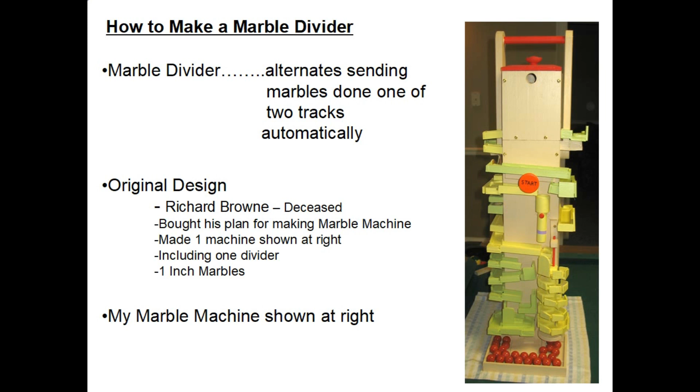Now, I got the original design for this from a Richard Browne who died a couple years ago. He was a retired engineer. He made the marble game for his granddaughter, and my version is shown on the right, and then he sold the plans to a woodworking company, and then I bought the plans from them, which included plans for one divider. And of course, this model is based on 1-inch marbles. I made one of these, and my finished marble machine is shown at the right.

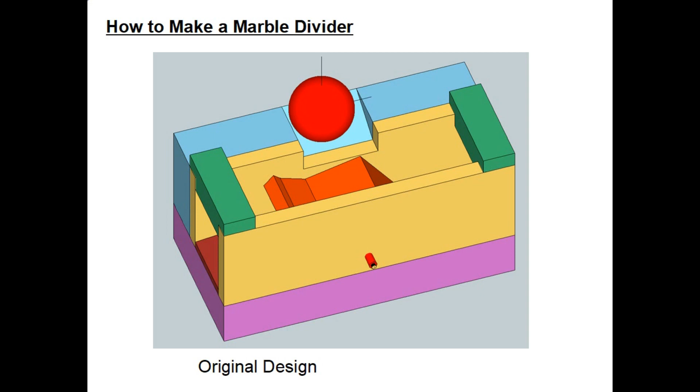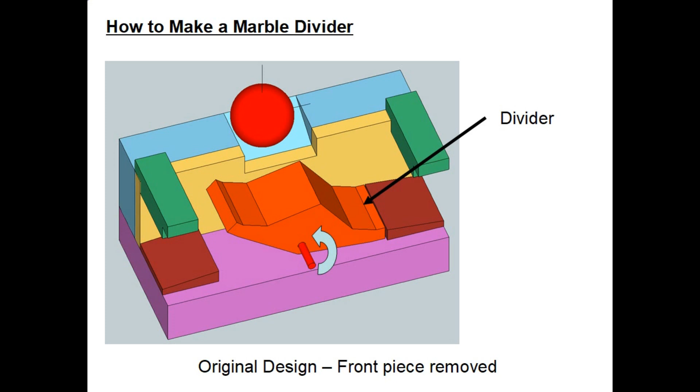This is a SketchUp drawing of the original marble divider that was in Mr. Browne's marble machine game. Let's temporarily remove the front cover from the divider so we can see all the parts inside. And there really isn't much to it. The main element is the center orange piece, which is the divider or flipper, and the rest is just kind of a box to hold up the assembly.

Now let's take a look at how this device actually works. I've got 6 series of diagrams here. They start at the upper left, they flow down to the bottom, and then go up to the second column to the top and flow down to the bottom. In the upper left, you see the marble. It's ready to enter the divider. On the second picture down, you see that it's now fallen down against the flipper. And then the third one at the bottom, it started to move towards the bottom because of the weight of the marble.

Now in the upper right, it's continuing to move down. The second photo, or middle one on the right, the marble's got the flipper clear down now, and it's ready to exit the device. And on the bottom right, you see the marble on the tapered piece where it leaves the divider and enters a track.

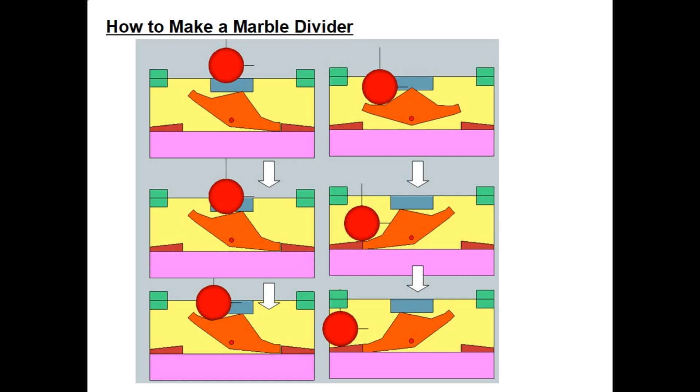Now after that first marble left the divider on the left-hand side, notice that the flipper, the left-hand side, is still down. Now here comes the second marble entering the divider at the top. In the middle, it automatically goes on the right-hand side of the flipper, and the weight of it pushes the flipper down until the marble exits on the right-hand side of the divider.

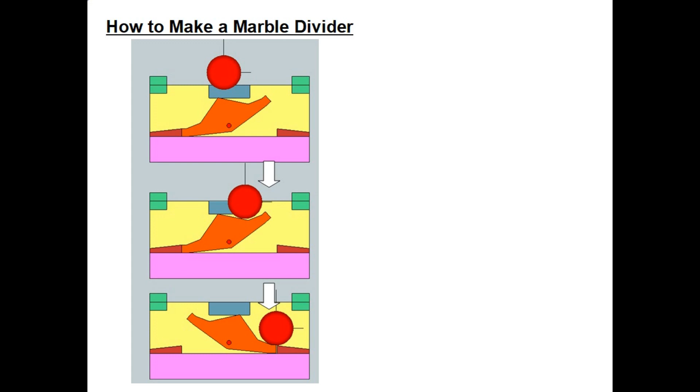Now at this point, I wondered if I should make a video of the wooden divider device working, or it might be easier just to make an animation of it in SketchUp. So I decided to go the animation route. So what you do is create a starting scene in SketchUp and then export that as a JPEG file, because my version won't create GIF files. And then I convert each JPEG over to a GIF.

Then I rotate the mechanism to the next scene, whatever angle of degrees rotation you need to break it up and make a nice animation. On scene 2, I export that as a JPEG and convert it to a GIF. I keep repeating that process until a full cycle is done. Then I use a program called Unfreeze from 2001 from Whitsoft Development, and I checked and it's still available in 2022. I import the GIF files into that Unfreeze program in the right sequence.

Then I use that program to export an animated GIF file. And you can pick what speed you want, and for this I picked 50, and they call it the frame delay speed. Once I had the animated GIF file, I used another piece of software to convert that to a standard Windows WMV file. So let's take a look at the animation and see how this divider works.

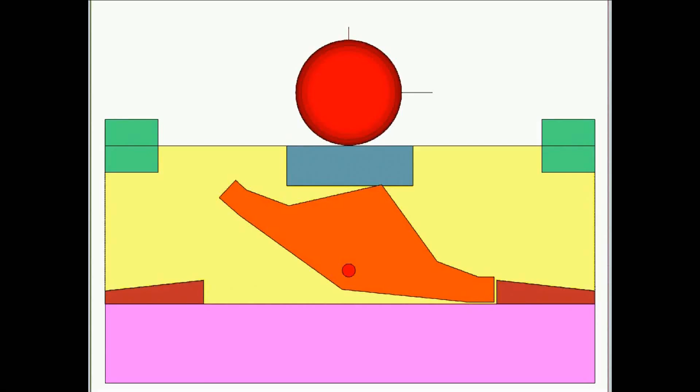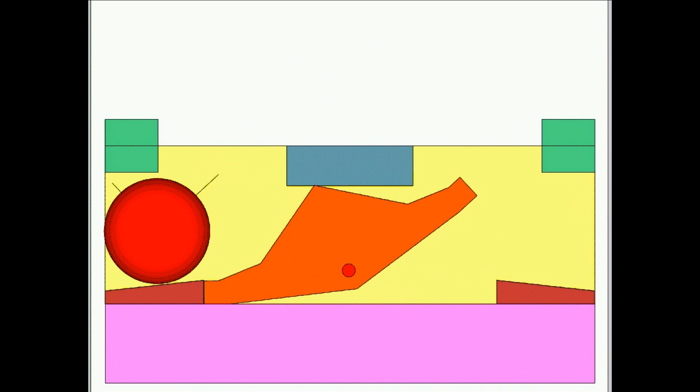Now I have made 3 or 4 of these divider devices, and on a couple of them I had some issues. They work like 90% of the time, but sometimes, as shown here, the marble should fall and go down the left-hand side of the flipper and exit the left-hand side. Sometimes it rolls over that top crest and goes to the right and then exits on the right-hand side chute. So I got to wondering, could I come up with a more robust design that works 100% of the time?

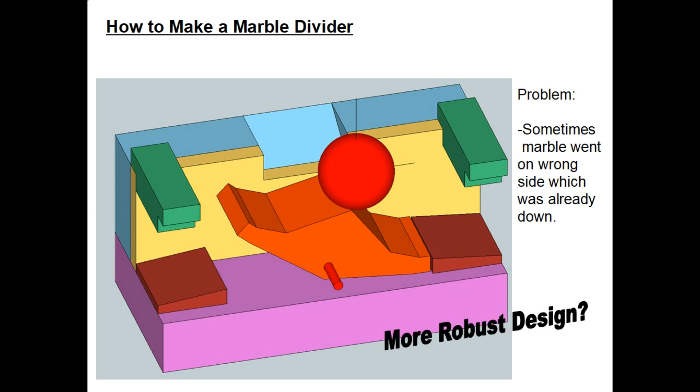So for my improved design, what I ended up doing was adding a protrusion or a lip at the top of the flipper. And here you can see the old flipper and the crest of that flipper, where the marble would sometimes go on the wrong side. On the new design, I made that little protrusion upwards, and my current models using this design work 100% of the time.

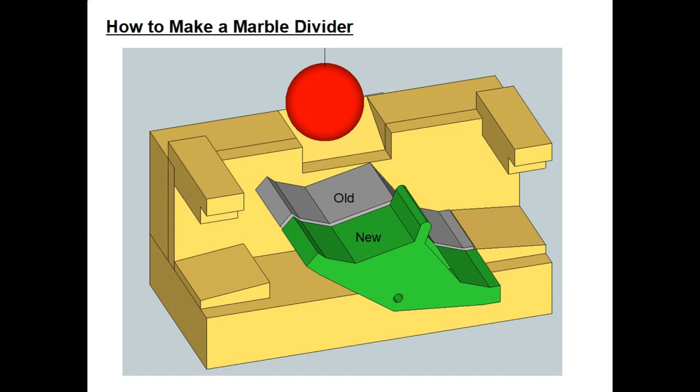And I would recommend making the flipper out of a hardwood like oak, maple, hickory, walnut, something hard to stand up to the wear of the marble. Plus, it lets you make that little lip. If this was pine, it's likely that top little lip would break off.

I usually upload my finished designs to the SketchUp warehouse, but in case you don't use SketchUp, I went ahead and made some dimension drawings on how to build this improved version of the marble divider.

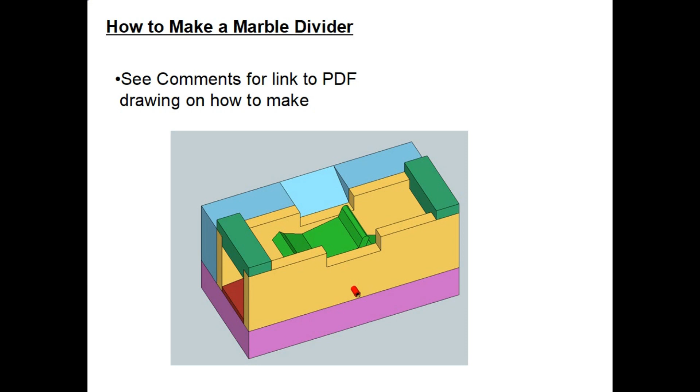So, in summary, this short video explains how to design and build a wood marble divider.